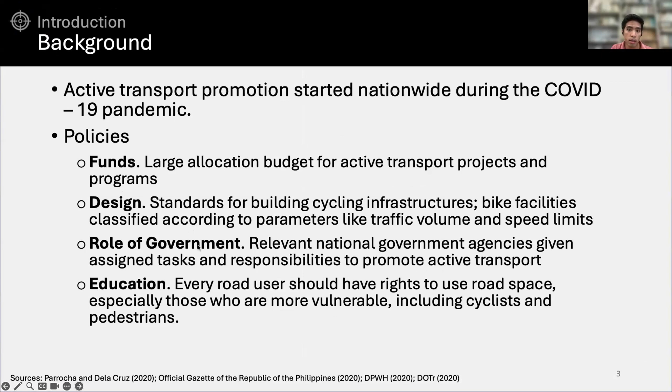As a background, during the COVID-19 pandemic, the Philippine government promoted active transport by funding projects and programs, standardizing designs for bike facilities and infrastructures, defining agency roles among other government agencies in the Philippines, and educating for safer interactions on the road, especially for pedestrians and cyclists, who we see are the most vulnerable among the others. So the establishment of bike lanes led to a rise in cyclists, as well as cycling accidents, with a 48% increase in Metro Manila from 2019 to 2020.

Moreover, some bike lanes are disconnected, and as normalcy returns after COVID, the need for bike lanes is being questioned in some areas in Metro Manila, which became the most congested metropolitan area in 2023. So this leads to the formulation of the research problem, which focuses on designing a bike network that considers the existing traffic, the road space, and budget constraints, with the goal of enhancing cyclist comfort and ensuring connectivity of links that have bike lanes.

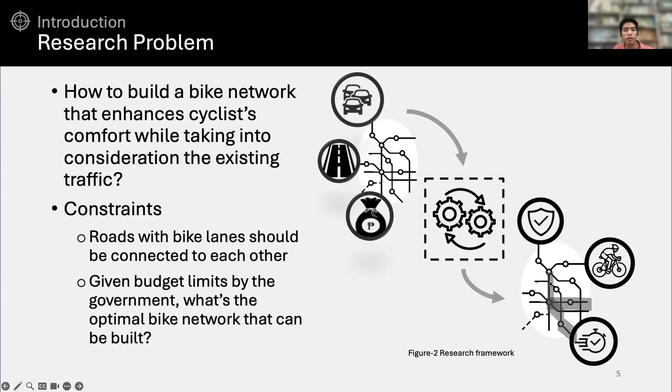So for the scope of my research, I selected Pasig City in Metro Manila as my study area due to its dedication in promoting cycling, its institutional capacity, and the city having an existing bike network, which has been established even before the pandemic.

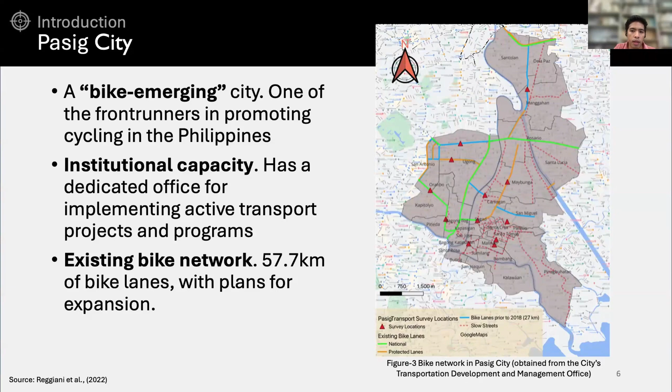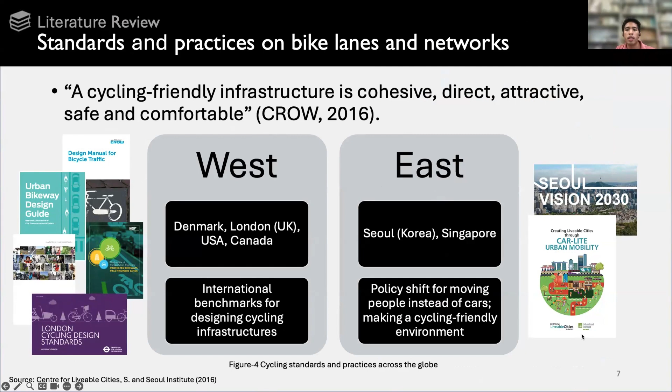In my literature review, international benchmarks for cycling infrastructure are primarily from Western countries. CROW from Netherlands identifies five key elements of cycling-friendly infrastructure, which are found to be consistent across various guidelines. On the other hand, recent policy shifts in Eastern countries like Korea and Singapore now emphasize moving people instead of cars and creating cycling-friendly environments.

Creating a cycling-friendly environment has been explored in previous studies, especially with bike network design. These studies used optimization problems in building bike networks according to selected goals, such as maximizing accessibility, comfort, or bike travel, or even minimizing cycling risks to prevent further accidents for cyclists, as well as others that interact with them.

On the other hand, a road that allows faster speeds, has higher traffic volume, and higher parking turnover rate decreases cycling comfort levels. Originally developed in the US, BCI is now widely used and accepted and has been used in other studies as well. In this study, I also adopted the BCI for bi-level optimization.

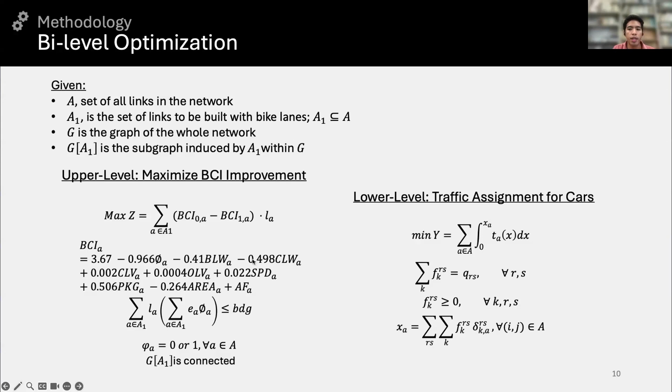Then each set of links forms a subgraph to ensure connectivity of links, and this must stay within the budget imposed on the model. So solving for the optimization problem, I used a genetic algorithm which has been used in previous studies in optimizing bike networks.

This generates an initial set of solutions used to obtain values of the objective functions in the lower and upper levels. Solutions with the optimal value will undergo crossover and mutation techniques that generate offspring solutions more likely to improve the values of the objective function. This cycle continues until the maximum number of iterations is satisfied, which will then further identify the most optimal solution in this framework.

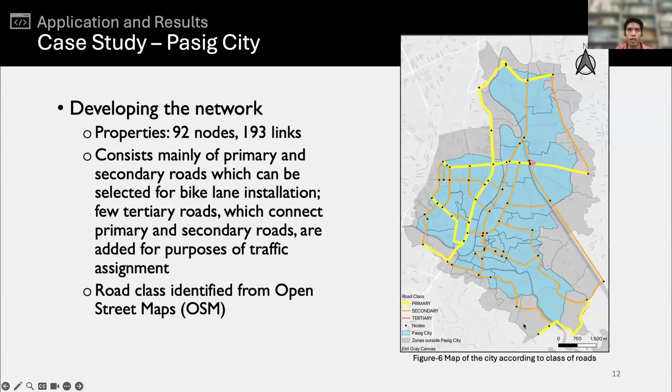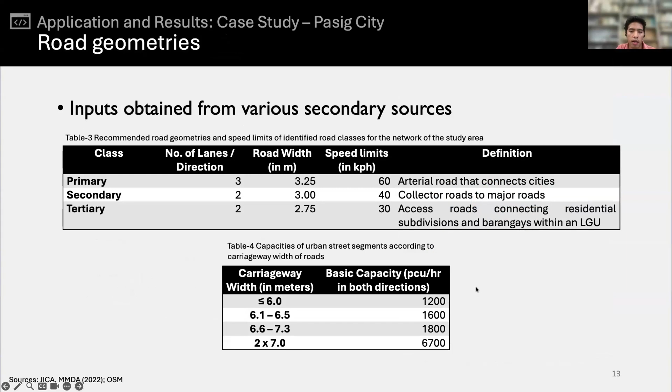So these network roads feature classifications such as the road class, number of lanes, road widths, road speeds, and capacities, whose minimum and recommended requirements were derived from existing reports for Metro Manila, Google Maps, and OpenStreetMap, among others.

So in that particular trip demand, I used the morning peak hour of the area, that is around 7 to 8 o'clock in the morning.

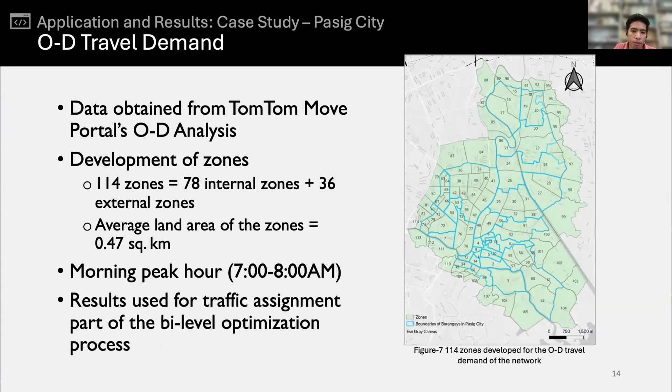So assuming lane widths in all roads measure 3.35 meters, lane width reduction applies only to roads with 2 or more lanes. So for 2-lane roads, a temporary road diet is proposed since the bike lane width doesn't meet NACTO's minimum requirements of 1.5 meter for conventional bike lanes.

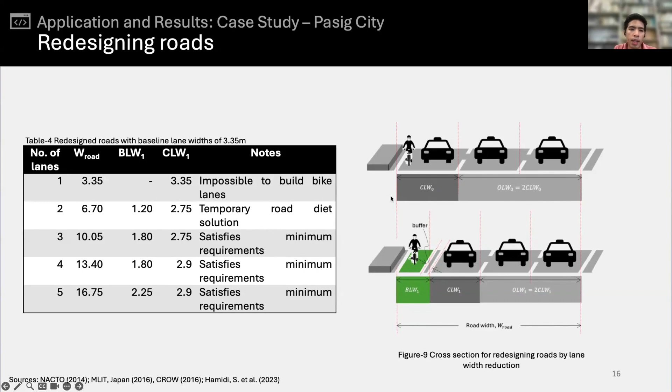So this proposal follows Japan's Ministry of Land, Infrastructure, Transport, and Tourism's guidelines, which recommended bike lanes of at least 1 meter wide where space is limited. So for other lanes, both the bike lane width and curb lane width meet the minimum requirements.

Moreover, the presence of a critical link in the solution shows a link that weakens the network connectivity, as the removal of this particular link will violate the connectivity constraint that is imposed in the model.

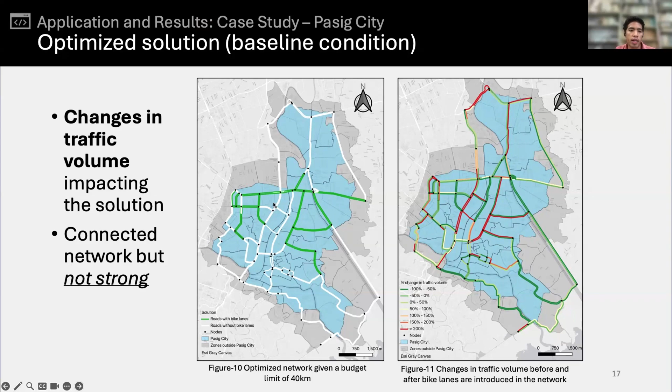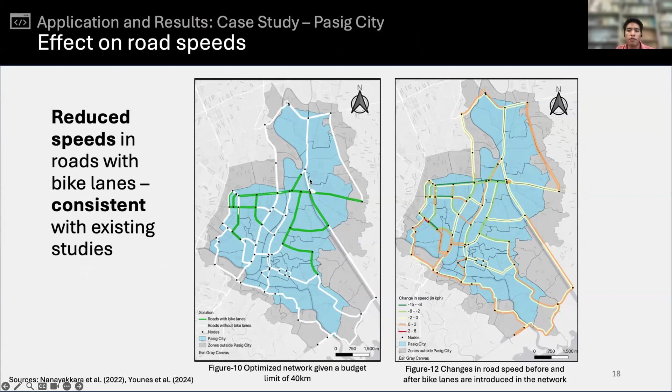On the other hand, observations on roads with bike lanes have reduced speeds. As we can see here, the roads that have greener links have reduced speeds, and those are the ones that are built with the bike lanes. So this is consistent with existing studies showing the impacts of building bike lanes on motor vehicle traffic.

Moreover, from the perspective of transport planners and authorities, this budget constraint feature of the model can be taken advantage of to determine which links should be prioritized to immediately improve cycling comfort in the network. In this case, this area is the first one that will be built with bike lanes, since this area provides more comfort. And once you increase the budget limit in the model, the network continues to grow until it reaches the other side of the network in this case.

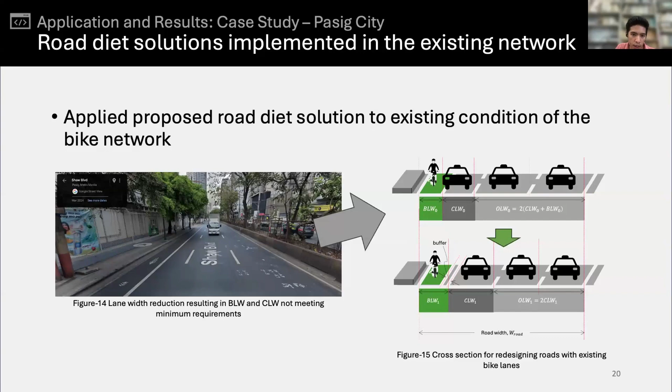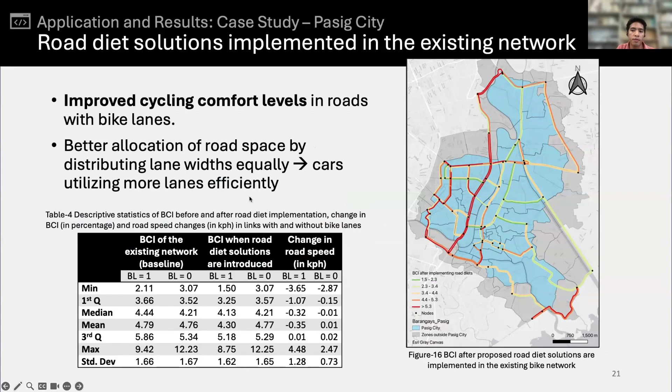The proposed road diet solutions address this issue, adjusting the lane widths to evaluate their impact on the existing network. When these proposed solutions were applied, we saw slightly improved cycling comfort levels in roads with bike lanes, as shown in this table. This is apart from motor vehicle traffic being able to use the curb lane width more efficiently after the curb lane widths were adjusted.

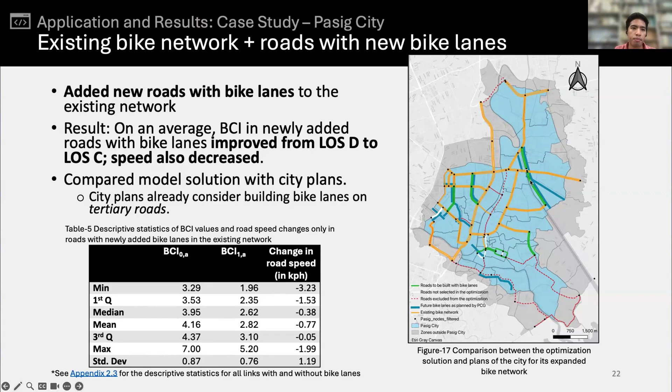For the conclusion, this research applied the model to Pasig City, which enhanced cycling comfort levels. Traffic volume parameters between the lower and upper levels of optimization significantly impact the selection of roads for bike lanes. Roads with bike lanes show reduced speeds compared to when they had no bike lanes. Additionally, budget constraints can help transport planners and authorities plan their network according to their timelines.

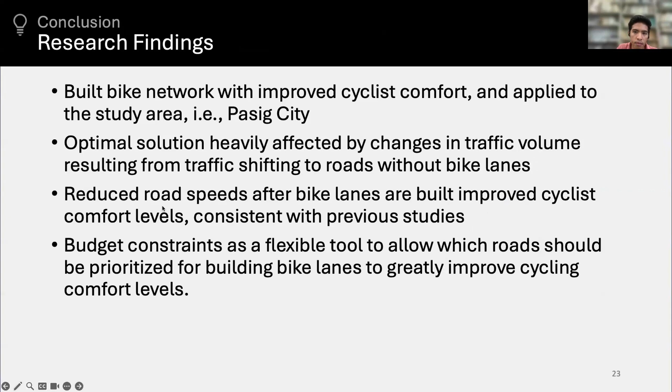While conducting this study, a number of limitations were encountered. First, the BCI tool, even though widely accepted, was not locally calibrated due to time constraints. Then, secondary sources underestimated OD travel demand on congested roads, which really affected the solution, considering that a particular road in the network was initially not congested, but its existing condition is really congested. This really affected the solution for this particular study area.

Furthermore, while there is a connectivity constraint, it only checked the link connections and not the quality of the network's connectedness. Hence the solution has weak connectivity, particularly a critical link in a major road in the network. Tertiary roads were also excluded from bike lane construction, based on input from an officer I interviewed in the transportation department of the Philippines. Finally, cyclist demand, which was attempted to be incorporated in the model, was not considered due to a lack of available OD data, especially for cyclists.

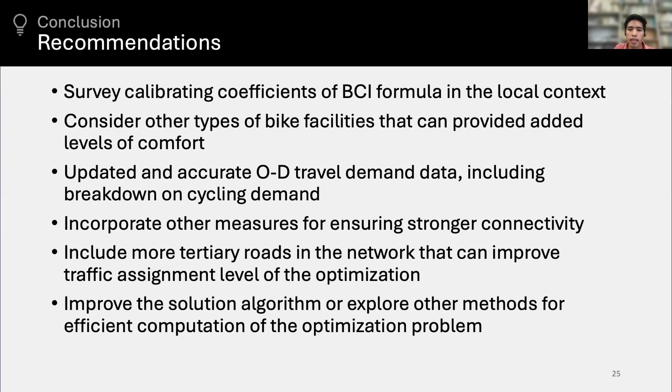Thank you very much. Thank you very much, Justin.

So we have two questions in the chat, I will read them out loud. Thank you for your interesting talk. It seems the bi-level model presented on page 10 includes at least two modes, cycling and vehicles. Is mode choice, how passengers select between cycling and vehicles, involved in the study? Are you using mode choice to model the mode that actually users use?

For this study, I haven't included mode choice, considering the lack of data for doing so and conducting the study on determining the mode choice in that particular study area. But I think it's also important to consider mode choice to determine which routes the cyclist will go to when they use a bicycle around the network to travel, as well as whether they will even use bicycles, considering that right now in the Philippine setting, cycling trips are relatively low compared to other global cities that are really bike friendly.

But I think in future studies, conducting mode choice is a good idea to determine further how many trips can come from cycling in this particular network.

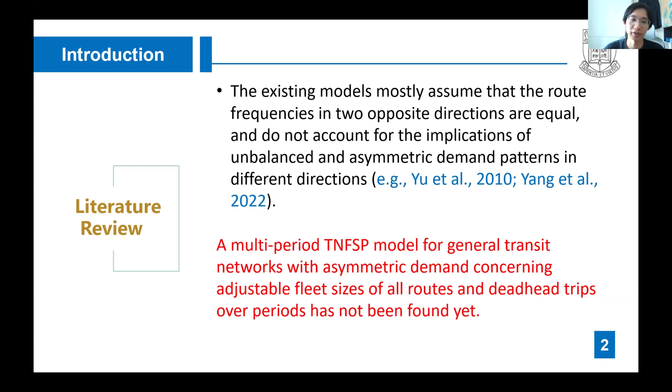We also noticed that the bus operator serving Tin Shui Wai, a suburban residential area in Hong Kong, is facing the same issue. Most residents of Tin Shui Wai work in the urban area of Hong Kong, and bus service is the main commuting mode for Tin Shui Wai residents. However, compared with the stable and relatively balanced ridership to and from Tin Shui Wai in off-peak hours, passenger travel demand has significant directional characteristics during peak hours.

However, the traditional symmetric design still cannot fully meet the asymmetric demand pattern. So the operator hopes to adjust the current design for the developed network to adapt to passenger demand variation and improve their operating profit. Especially during peak hours, the route frequency should increase in the direction with high demand, while that in the low-demand direction should decrease, to allocate more buses to the high-demand directions.

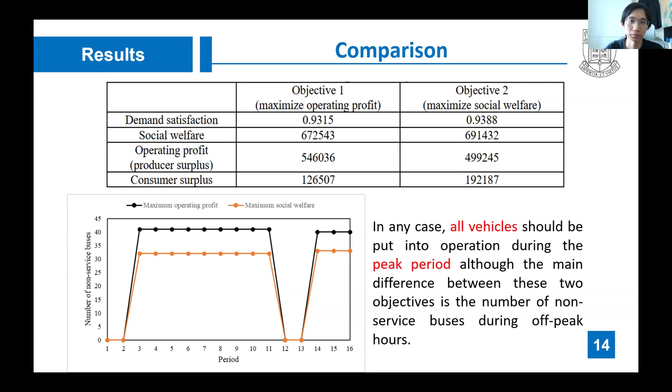Also, we compare the traditional symmetric design throughout the day, and we find that the proposed design performs better than the traditional design in all-day operation, with different degrees of improvement in both peak and off-peak hours. We also found that as the minimum frequency decreases or the demand level increases, the proposed design provides more significant benefit to passengers and the operator.

So that's the end of my page. Thank you very much.

This is a little bit out of my expertise, so it's going to be a very basic question. But I want to ask, how do bus operators in Hong Kong actually do the assignment at the moment? Because I would assume that maybe they base it on their experience, since they have been doing this for a long time. And do you think this kind of heuristic based on experience is working for them? Because I would assume they would not like to lose some profits, right?

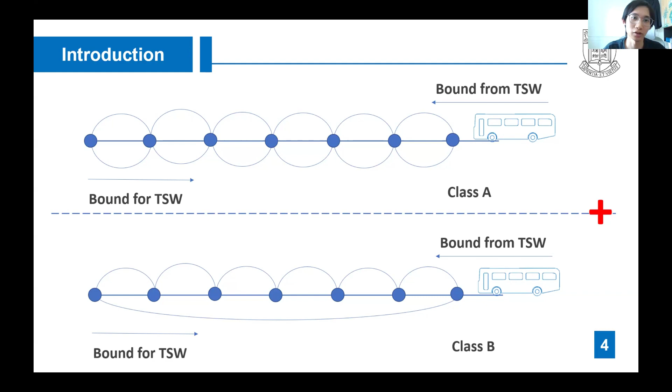Yes, they will also talk with us, and we found that passengers can read the frequency setting easily, not with frequent changes, so they think this is okay.

Testing, can you hear me? The volume is a bit low. Can you hear me now? It's a little bit low. Can you talk? Testing, good, okay, thank you.

Thank you, Professor Parati. Good morning, afternoon, and evening. This is Mingxuan from the University of Hong Kong, and I'm also from the research group of Professor Jintao. Today, I'm going to talk about a loading strategy for the bike repositioning problem with e-bikes and conventional bikes.

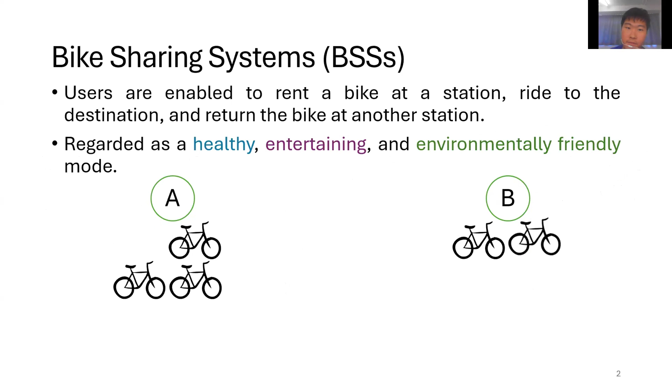Bike sharing systems have been implemented worldwide. In such systems, users are enabled to rent a bike at a station, ride it all the way to the destination, and return the bike at another station. Bike sharing has been regarded as a healthy, entertaining, and environmentally friendly mode of transport.

At the end of the day, due to user activities, some stations may become in surplus or deficit in terms of bikes. This will result in failed user requests. For example, a user cannot rent a bike at an empty station. So that's where bike repositioning comes in.

The purpose of bike repositioning is to rebalance the number of bikes at each station. A typical way is to hire a truck and transport bikes, for example, from station B all the way to station A. The bike repositioning problem includes a routing problem, which stations to visit and the order of visits, and also a loading and unloading subproblem, how many bikes should be loaded and unloaded at each station.

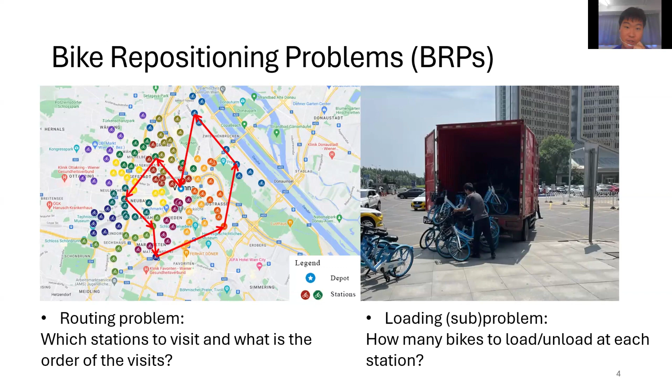The challenge in the loading strategy is that the vehicle capacity is limited. So how do we allocate the limited vehicle capacity between the two types of bikes?

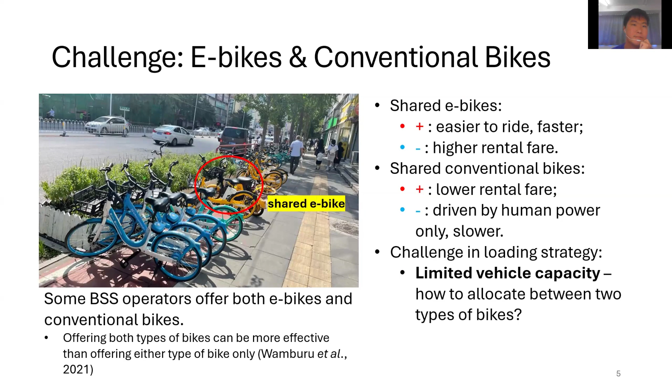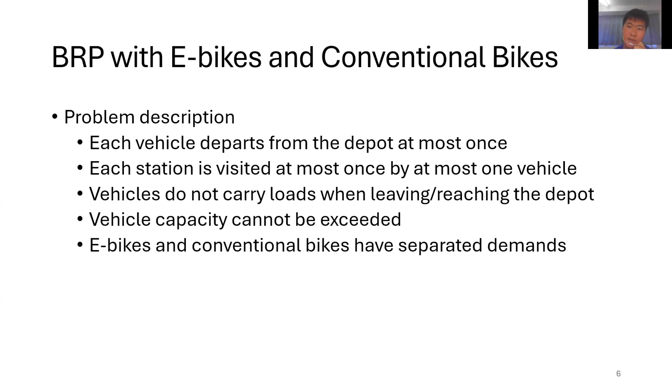Here's the problem description for this bike repositioning problem. Each vehicle departs from the depot at most once. Each station is visited by at most one vehicle, and the vehicle does not carry any load when it leaves or reaches the depot, and the vehicle capacity cannot be exceeded. E-bikes and conventional bikes are considered to have separate demands, and the objective is to minimize the weighted sum of the total deficiencies of e-bikes and conventional bikes and the total travel, loading and unloading time. Here's the model for the bike repositioning problem.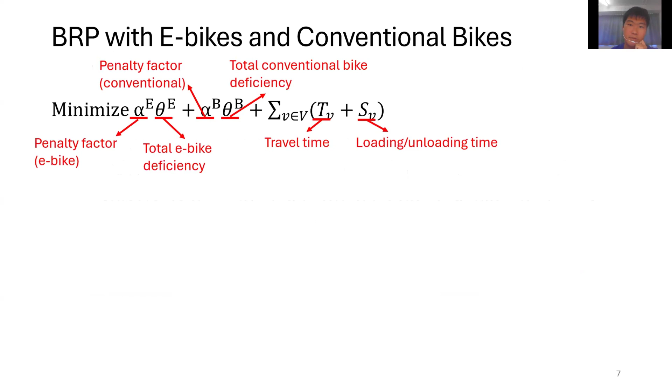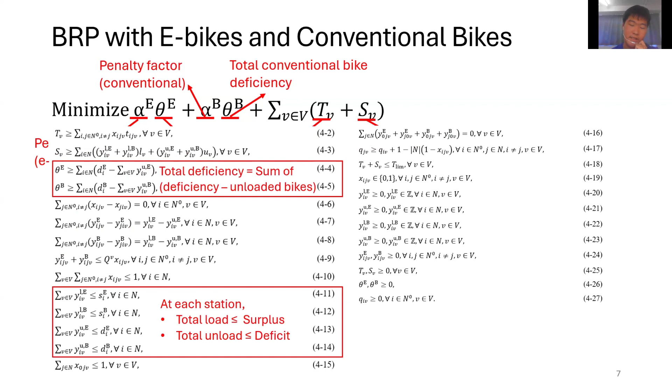The first two terms are the weighted total deficiencies in e-bikes and conventional bikes, and the third term is the sum of the travel time and loading and unloading time. In terms of constraints, the total deficiency is defined by the sum of the deficiency minus the bikes unloaded at a station, and also at each station, the total number of loading or unloading are bounded by the surplus or deficit at a station.

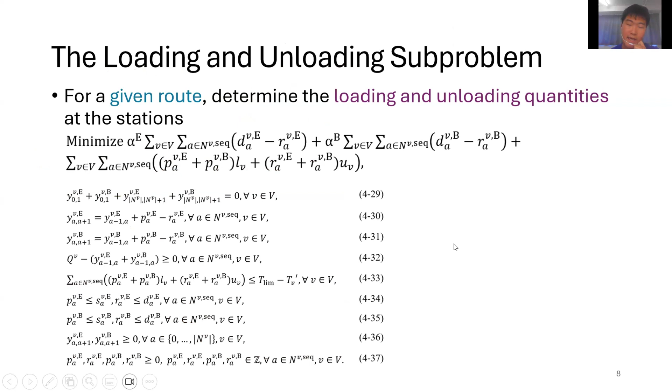So with the model given in the previous slide, the loading and unloading subproblem can be extracted from it by assuming that the route is already given. Once the route is fixed, the remaining task is to find out the loading and unloading quantities at each station. Again, the first two terms are the weighted deficiencies for e-bikes and conventional bikes, and the third term now only contains the loading and unloading time. This is a set for all the stations on the route, and again, the loading and unloading quantities are bounded by the surplus and the deficit at a station.

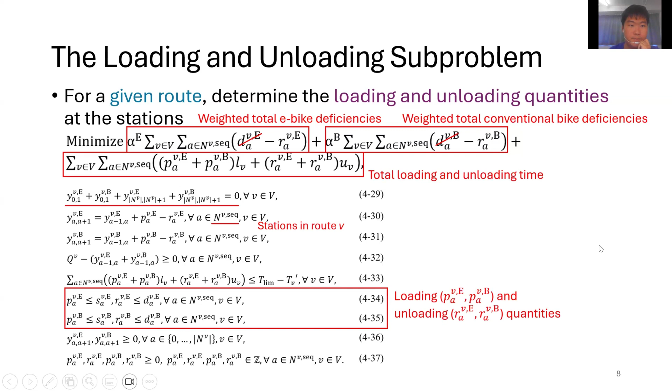Because the D terms refer to deficit at a station, they are parameters, so they can be removed from the objective. By rearranging the objective, we get this. Because the decision variable R, which refers to the unloading quantities of e-bikes and conventional bikes, is non-negative, if the parameter in the brackets is also non-negative, then there is no benefit to do any relocation. By assuming that the parameters in the brackets are smaller than 0, two specific cases are considered.

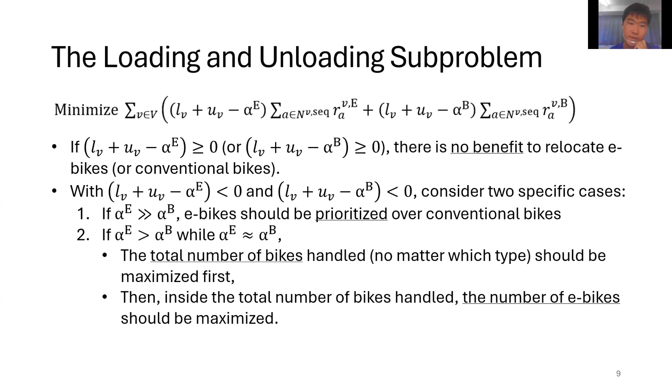Firstly, the unit penalty for e-bike is far larger than that of a conventional bike. The second case is that the unit penalty for e-bike is just slightly larger than the conventional bike. For each case, there is a tailor-made algorithm, but due to time constraints today, algorithm 1 will be the focus. Let's consider this example.

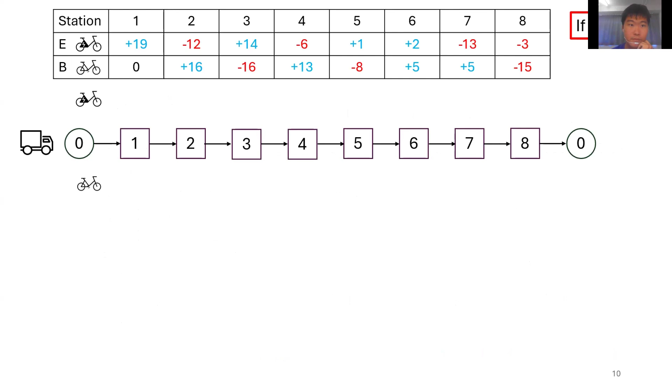Supposing we have a route with 8 stations, and the surplus and deficit of e-bikes and conventional bikes are shown in the table above. The blue values are the surplus and the red values are the deficit. A simple way is just to consider the loading and unloading in a forward greedy method. Forward means that the loading and unloading quantities are confirmed from the beginning of the route, and greedy means that we just basically load or unload as many as possible.

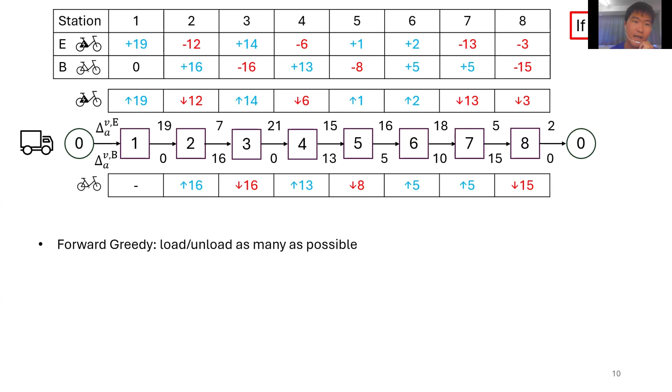This will result in loading and unloading quantities like this. After having this, we can also calculate how many e-bikes and conventional bikes are loaded on the vehicle when it travels from a station to another. For example, after loading 19 e-bikes at station 1, there will be 19 e-bikes on the vehicle when it travels from station 1 to station 2.

However, there are two problems observed here. Firstly, there are some e-bikes loaded, but they are not unloaded at any other stations. This violates one of the problem descriptions. Also, previously we just assumed that the vehicle has infinite capacity, but suppose we have a capacitated vehicle with a maximum capacity. Then at these locations, the vehicle capacity is exceeded. This reminds us that one of the challenges is how to allocate the limited space between two types of different bikes.

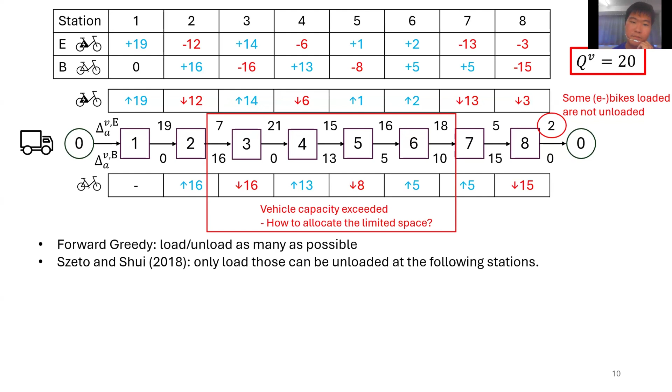So in this paper published in 2018, they considered the loading and unloading strategy for a single type of bike. The idea is that the bike should only be loaded if it can be unloaded at the following stations. Following their idea, if we consider the loading quantities for e-bikes, for example at station 3, the outstanding deficit at the following stations from 5 to 8 is 13, and the deficit at station 4 is 6. At the same time, the current load of e-bikes on the vehicle is 7.

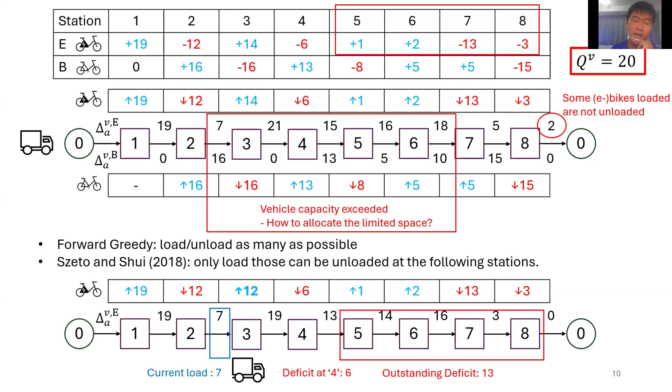So instead of loading all 14 surplus e-bikes at station 3, loading just 12 will be enough to fill the deficit at the following stations. By doing this, there will be no e-bikes loaded but not unloaded at another station, and if we just consider e-bikes, the vehicle capacity is not exceeded as well.

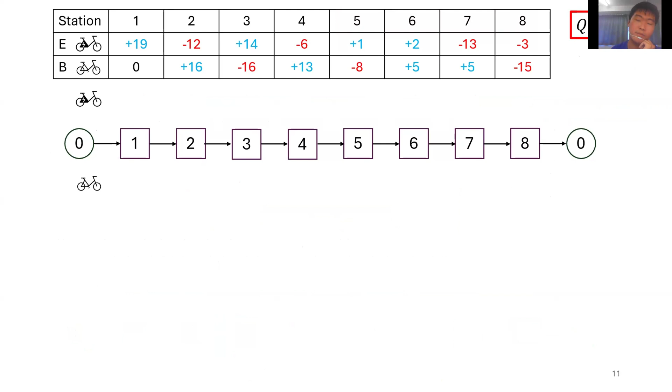So using the similar idea, let's consider the loading and unloading strategy for both e-bikes and conventional bikes. In algorithm 1, e-bikes are prioritized because they have a far larger unit penalty. So here we consider the loading quantity of e-bikes first from backward, and at the same time for the unloading quantity, we just assume that all the deficit can be filled. The unloading quantity will only be figured out after the loading quantities are calculated.

The gray value means that we just assume the deficit can be filled by loading e-bikes there. So when we consider the loading quantity at station 3, the current outstanding deficit at station 3 is 19. The calculation process is here, and the station surplus here for e-bike is 14. Taking the minimum value of these two, 14 e-bikes are loaded at station 3.

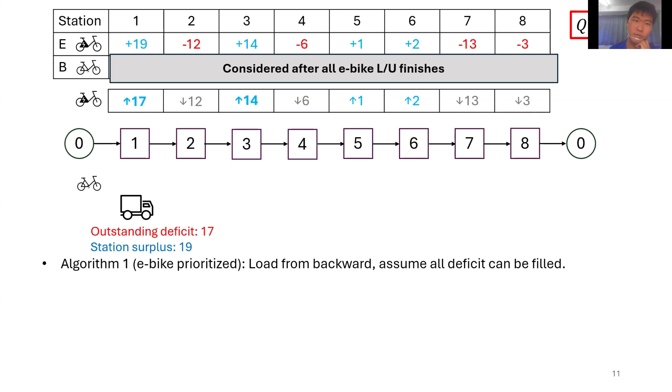For station 2, we just assume 12 can be unloaded. For station 1, the outstanding deficit here is 17, while the station surplus is 19. By taking the minimum of these two, loading only 17 e-bikes will be enough to fill the deficit at the following stations. So after having the loading quantities, the unloading quantities, together with the loading of e-bikes on the vehicle along the route, can be calculated.

Then we proceed to consider the conventional bikes. For example, at station 7, the surplus of conventional bike is 5, and the deficit at station 8 is 15. So we can just load 5 conventional bikes at station 7.

However, when it comes to station 6, the outstanding deficit is 10, and the station surplus is 5. But because we already know that there will be 16 e-bikes on the vehicle when it travels from station 6 to station 7, at most 4 conventional bikes can be loaded at this station.

Similarly for station 4, the outstanding deficit here is 14, the station surplus is 13. But because there will be 13 e-bikes on the vehicle when it travels from station 4 to station 5, at most 7 can be loaded at this station. Also similarly at station 2, although there are like 16 surplus conventional bikes at the station, at most 15 can be loaded.

So after having the loading quantities, the unloading quantities, the red numbers, and the loading of conventional bikes on the vehicle along the route can be calculated.

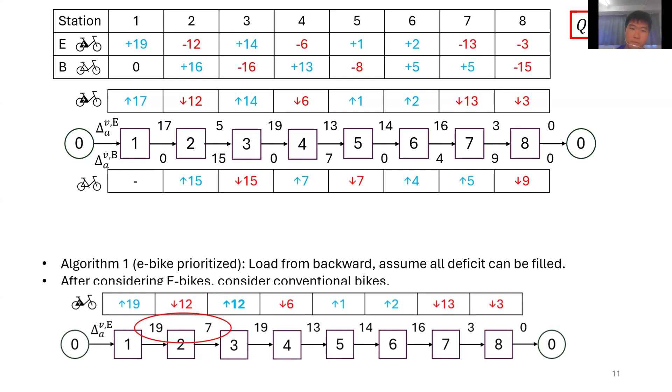For example, in the circled area, if we follow the loading quantity of e-bikes on the previous slide, there will be 7 e-bikes on the vehicle when it travels from 2 to 3, which means it will be impossible for us to load 15 conventional bikes at station 2 because of the vehicle capacity.

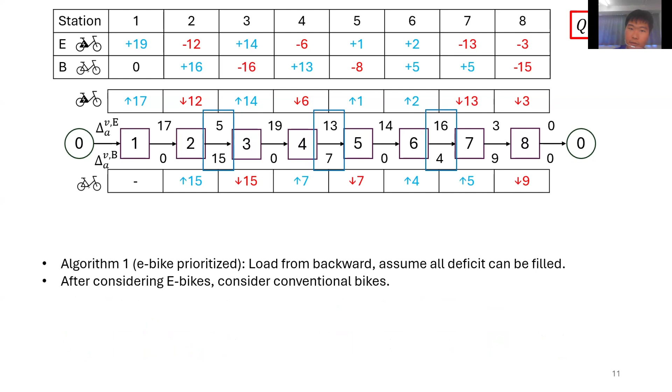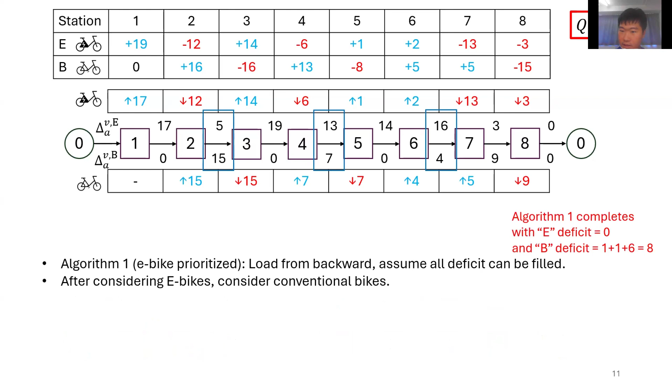So here, if we check the vehicle loading at the critical points, we can find that the vehicle capacity is not violated. And here, algorithm 1 completes with no e-bike deficit, and the conventional bike deficit is equal to 8.

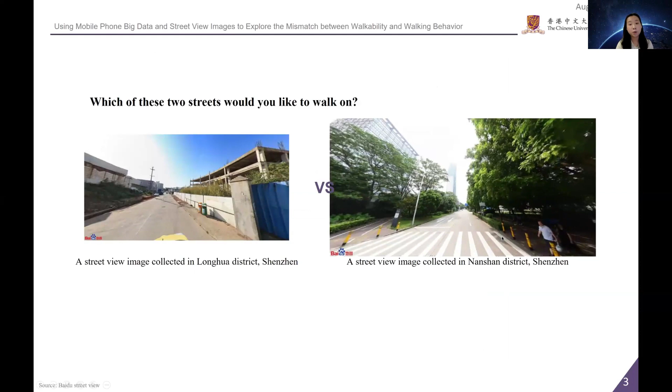These two pictures show different streets, and I would like to ask a question: which street would you prefer to walk along? I believe most of us would prefer the right street with greenery, street lights, and sidewalks. The left street has no sidewalks and no street lights. Obviously, the built environment on the right is more friendly for pedestrians. Walkability is defined as a measure of how the built environment is pedestrian friendly.

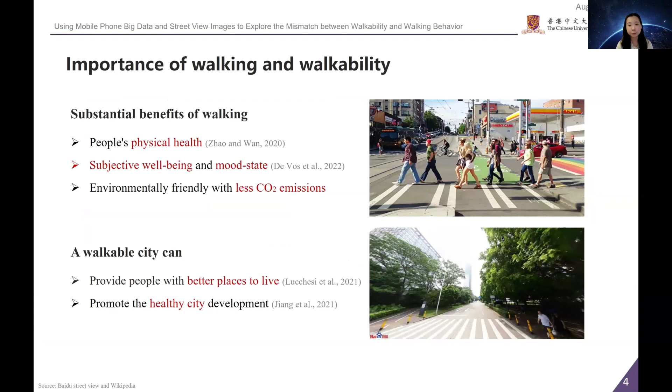Walking has substantial benefits to people's health and can reduce carbon emissions. A walkable city can promote healthy city development. So in order to promote more citizens to walk, it's important for us to understand the relationship between walkability and walking behavior.

After reviewing the literature, I identified several research gaps. First, typical walkability frameworks, such as the 3D and 5D frameworks, are developed from the perspective of urban form and based on random utility theories. They assume pedestrians make decisions based on maximum utility, shorter time or shorter distance. But in reality, pedestrians may prefer walking on safer or more attractive areas or routes rather than shorter times or distance. Obviously, these typical frameworks overlook some important pedestrian needs.

Most of them consist of meso-scale built environment features at the neighborhood level, like land use mix and street connectivity, and they overlook micro-scale features at the street level, such as trees, street lights, and sidewalks, even though these have a greater association with walking activity.

Regarding walking behavior, most studies collect it through conventional approaches such as surveys and portable devices, but these methods are costly and limited to small spatial-temporal coverage. Big data approaches, such as mobile phone big data, receive little attention in walking behavior literature. More importantly, in existing big data and mobile phone big data studies, the validation part is commonly unclear, and that is a problem because further discussion on big data studies without verification is probably meaningless.

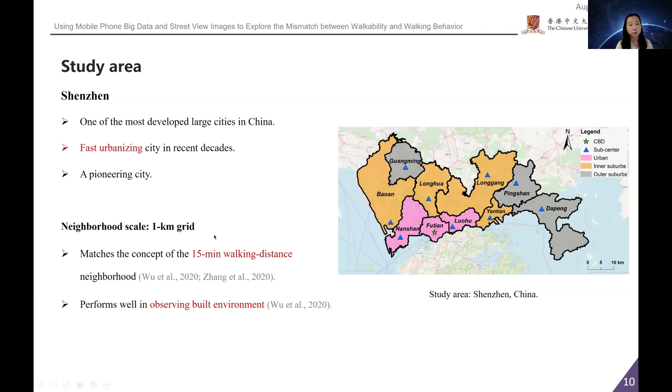Walking behavior is extracted from mobile phone data, and I focus on collective walking behavior. The variable is the number of walking trips in the neighborhood. Walking trips are extracted from 6 months of mobile phone data. The data is cellular tower-based data collected from CMCC, the largest telecommunication company in mainland China. Walking trips are extracted through a rule-based heuristic method. I collected over 174 million walking trips in Shenzhen.

I collected some ground truth GPS data to validate the walking trip extraction method. I recruited volunteers to collect their GPS data for 2 weeks through a mobile app, and at the same time they reported their trips and transport mode. I then converted the GPS data to cellular tower-based data and used the DCM method to extract walking trips from the data. Based on the confusion matrix, I calculated the accuracy rate of the walking trip extraction method, and it's more reliable than previous studies that validate their methods with official modal share or aggregate data.

Based on social psychological theories, I built a walkability framework from 4 pedestrian needs: safety, convenience, continuity, and attractiveness. All the variables are extracted from open data, such as street view images, social media data, POI data, government open data, and GIS data. The framework also integrates meso-scale and micro-scale environment features.

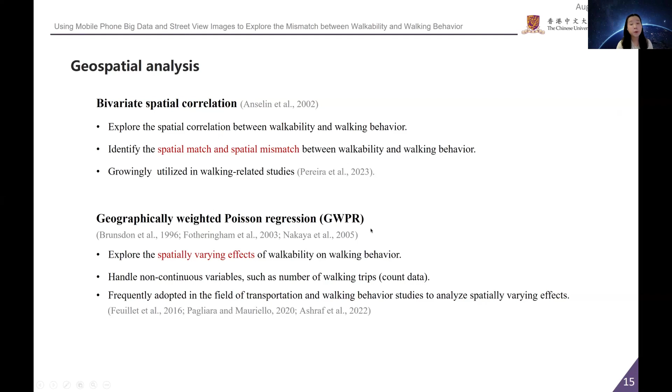I'm not sure if everyone is familiar with the urban village in China. It's an informal housing type that provides cheap, high density housing for low income people. It's quite popular in large cities in China. Even though urban villages have high density walking demand, they are served by a pretty poor walking environment in the city.

The result of GWPR reveals the spatial varying effect of walkability on walking behavior. First, the positive effect of walkability is strong in the fringe part of urban areas and in the inner suburbs.

In terms of the 4 subdimensions: the positive effect of safety is strong in the suburban areas, and the positive effect of convenience is stronger in the outer suburb. The positive effect of continuity is greater in the western part of the city, and the positive effect of attractiveness is clustered in the central and western part of the city.

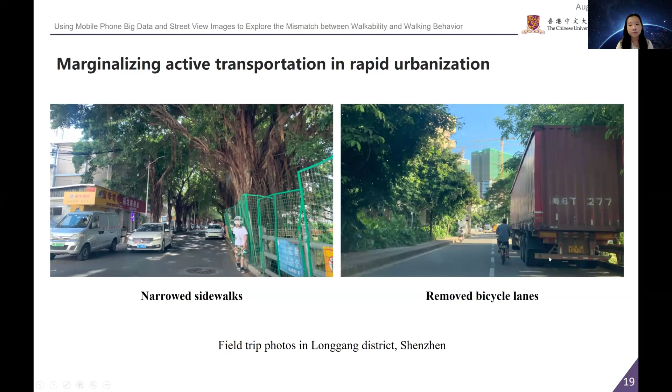In conclusion, our study explored the mismatch between walkability and walking behavior in Shenzhen using mobile phone big data and street view images. We identified the mismatch areas and explored the spatial varying effects of walkability on walking behavior. Based on the findings, we proposed some prioritized and contextualized built environment intervention strategies and policy implications.

We also shed light on the fact that a city-wide uniform strategy may not fit all regions in the city, and urban planners should perform strategic intervention based on spatial patterns to foster walkable and healthy cities. Thank you.

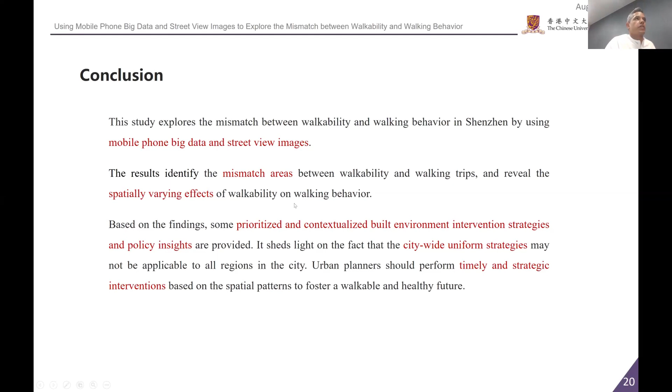Thank you very much. Can you show them the mismatch map? Where you have the high, high, high, low, low, high. Yes, here. So there are 2 things that I'm curious about.

First of all, what is the population? How much of the population lives in the high-high area, in the high-low area, in the low-high area, and in the low-low area? Because I think when you're thinking about a policy intervention, you also need to know how many people you are actually addressing.

The high-low and low-high areas are related to walkability and walking trips, and the number of walking trips may be related to the population, but here we just focus on these 2 variables, and maybe the area with more walking trips being a high density area is also quite common, but not necessarily related to density. In general, if I ask you what percentage of this city, Shenzhen, sorry, what percent of this city lives in the high area, for example?

20%, 30%? I didn't count the exact population numbers in the high areas, but it's quite common for cities in China that more people live in the subcenter or CBD areas, or more people living in urban areas and suburban subcenters in the city.

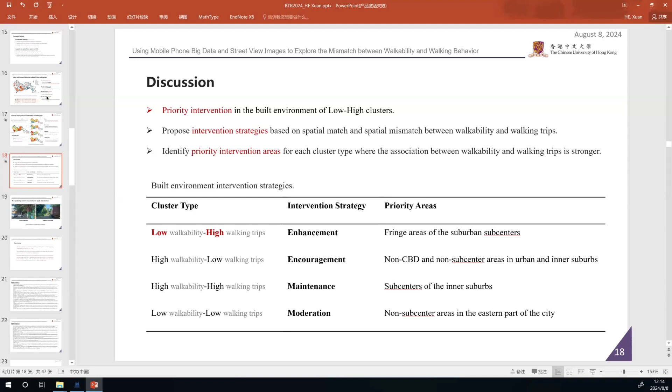Yikan, maybe you can unmute yourself and explain. Let's go back to the maps. We have different four clusters, right? The boundary areas between different clusters may not be that arbitrary, so it may involve the area could be a low-high area after a while. So would we change the corresponding strategies because of this dynamic change?

Sorry, I didn't catch you. So have you considered the evolvement of the different clusters? Yes.

That point I also highlight in the paper, because the low-high cluster, low walkability but high walking cluster, they're located in the fringe part of the subcenter. This may be related to the evolvement: at the very beginning, the subcenter is walkable and a very friendly environment for pedestrians, but the boundary of the subcenter becomes larger and larger. There are more population in the subcenter, and then the high walking trip areas become larger than the walkable areas, creating the low-high cluster in the fringe part of the subcenter. Am I clear? Yeah, that makes sense to me. Thank you, very good.

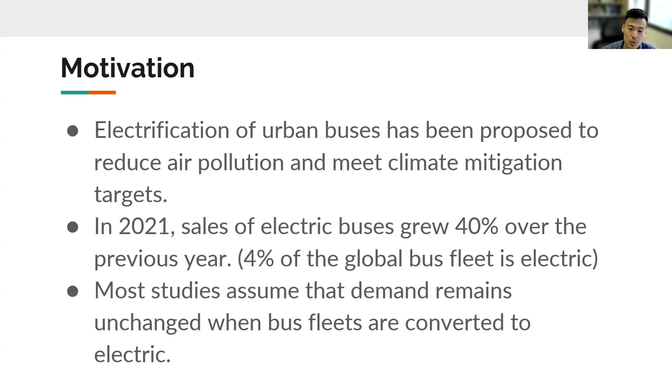Most studies that look at the effects of bus electrification assume that demand remains unchanged. They look a lot at the supply side and how things change because of the change in energy source, but assume riders behave the same way as they've always done. In this paper, we test the assumption that commuters are indifferent between electric and diesel buses, because there are amenities worth capturing from electric buses.

There are lower noise levels and also less local particulate matter from the exhaust pipes. We believe this could be quite important because if you are a public transport user, waiting at your bus stop or bus bay can be the moment of peak exposure to air toxins when a bus stops and then leaves, and you get all of the fumes from the tailpipe.

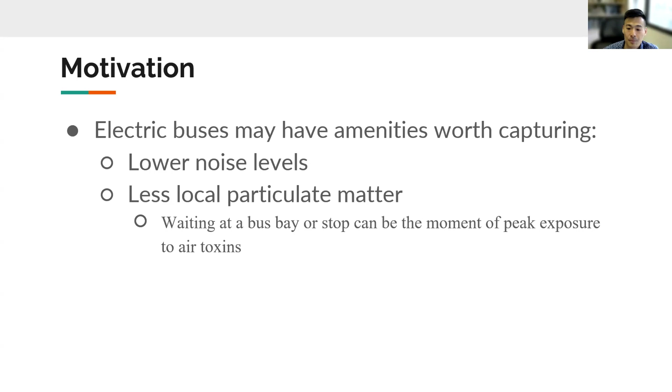The context we are looking at here is Singapore, because that's the city we are in, and because Singapore's Transit Authority, the Land Transport Authority, began electrifying buses in April 2020. Here we have a photo of the electric buses introduced. They are very similar to the diesel buses within the system - same color, look more or less the same, but with a few distinctions.

When you board the bus, there's a very small sticker that says the bus is an eco bus. If you board a double-decker bus, at the back, because there is space, they put a big sticker that says 'eco-friendly electric bus, 100% cleaner energy.' So there is some distinction from a diesel bus, but for the most part the colors and look are the same.

During the period of our study, April 2020 for about a year, only 60 electric buses were deployed. This is the beginning of the conversion of the fleet for Singapore, relative to a fleet of 4,000 buses - a drop in the ocean. There are also a small handful, maybe fewer than 50, hybrid buses within the fleet.

I'll start by giving a quick summary of our findings. We look at 3 data sources. The first is ridership data from LTA, the Transit Authority, on how people tap in and out of buses, riding the actual buses. Then we conduct 2 surveys: the first is an intercept survey, where we go to bus stops and interview or survey commuters when they are getting off the bus. The third is we run stated choice experiments with households, which I call a household survey - I'll give more details on that in just 2 slides.

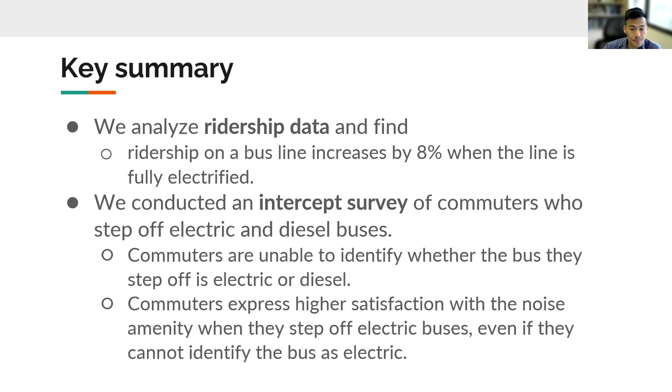And then finally, in our household survey, we gave our participants 2 choice experiments. In the first choice experiment, they have to choose between the powertrain of a bus, either electric or diesel, and at the same time there are different travel times associated with these buses, so they make that trade-off.

And then in the second choice experiment, they have to choose between an express bus and a regular bus, so that's a time trade-off, but of course the express bus is going to be more expensive. When we put these 2 choice experiments together, we can estimate a willingness to pay for an electric bus ride, and from that we get a number of 8.5 US cents per ride. That's how much more people are willing to pay to sit on an electric bus instead of a diesel bus. That aggregates up to $122 million more per year, or $20 more per resident per year.

Okay, so I'll start here by giving you more details on this ridership data we have, how we come up with this 8% increase in ridership. What we did is we asked the LTA for data on 15 of their busiest bus lines that were in our intercept survey, where we were surveying people at the bus stops. So from the intercept survey locations, we pulled the 15 busiest lines. 7 of those lines were partially electrified, and the remaining 8 were fully diesel across the entire sample period.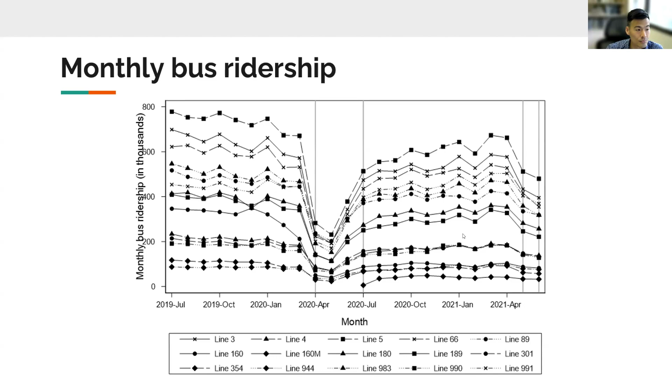Right, okay, so then getting to the results. First thing we do is aggregate up all of these rides to the level of our bus lines and week. So the observation here is the number of rides on a particular bus line in one week. And this is a standard fixed effects, or difference-in-difference, regression where we control for the bus line and for time, for the week.

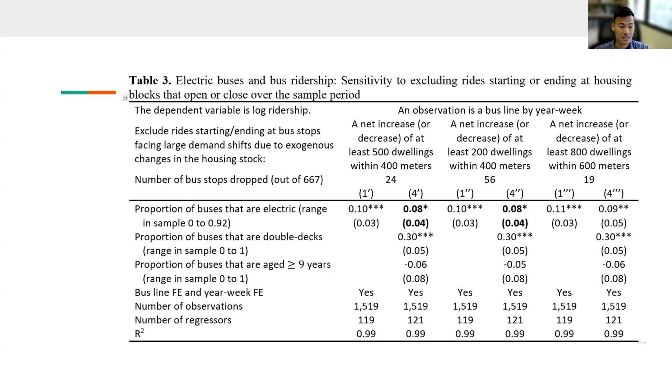A few other things we find, which I won't show tables for: ridership increases with both electrification intensity — the more electrified the line, the more ridership there is — and also the longer a line is electrified, the more ridership increases. That suggests commuters are learning and responding as they become more aware of these changes happening on their lines. There's also a list of other confounding factors we were concerned about, so we ran robustness checks and our results hold.

Okay, the next thing I want to talk about is this intercept survey. So the other thing we did is go to bus stops and talk to people, asking a very quick question about the bus they rode when they get off. We covered 4 neighborhoods within Singapore, all very quiet.

On average, the median number of buses serving each of these bus stops is just 2. There are 22 bus stops, 31 lines covered, and we interviewed almost 1,300 people getting off both diesel and electric buses between December 2020 and April 2021. This is the survey — we asked them two questions, or two categories of questions.

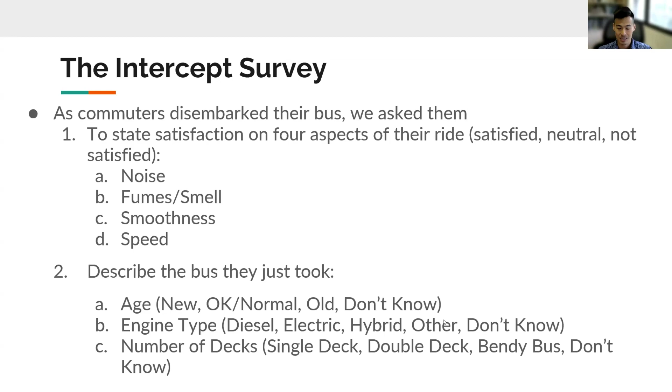Based on that, we have some results too. We then went and got the actual descriptions of the buses that these commuters rode from LTA. So we know, regardless of what they said, whether the bus is diesel or electric. We know how old the bus is, all of those things.

We could then verify whether these commuters were aware of whether the bus they're getting off is electric or diesel. Maybe not too much of a surprise, only 34% of people who step off a diesel bus can correctly identify their bus as diesel. And only 24% of people who step off an electric bus can identify their bus as electric. The proportion choosing don't know is high, 54% and 55% respectively. But that also suggests that the electric bus people are more often getting it wrong by saying it's diesel or hybrid, relative to the diesel people, where 34% of them are getting it right.

One thing we thought was that maybe it's difficult for commuters who get off partially electrified lines to tell you whether the bus is electric or diesel, because sometimes it's electric, sometimes it's diesel, and they're not always paying attention. So we limited ourselves to the sample of commuters who are only on bus lines that are fully diesel, so there's no changes going on, every bus they get off is a diesel bus. Can they then tell us that the bus is diesel? The answer is no. Still about 36% of them correctly identify their bus as being diesel, and 54% say that they don't know. So you don't do any better on fully diesel lines.

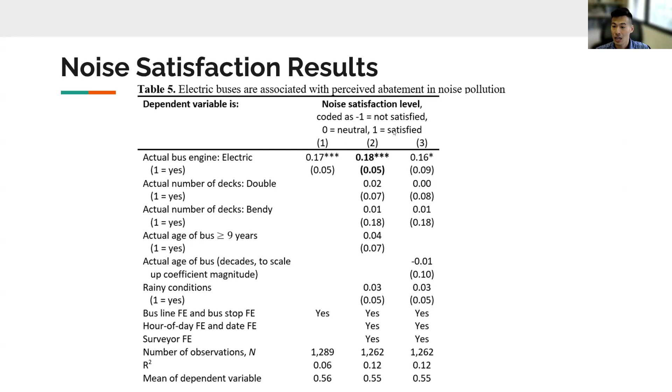Then we look at the satisfaction questions: are they satisfied or not satisfied with their rides in terms of the different qualities? We see that noise is the one thing people are more satisfied with when they step off an electric bus. Here's a simple regression where we code -1 for not satisfied and 1 for satisfied, 0 for neutral. We see that when the bus is actually electric, people are more likely to say they are satisfied with the noise levels on the bus.

Right. So then what happened with one of the bus lines, 944, the highly electrified line, is that the buses were pulled from that line and moved to a different area at some point in time, and so 944 becomes fully diesel at some point. And there we went back to survey the people to again see how people felt about the noise levels now that their buses were all diesel.

We find that 26% of the commuters said that the buses were now noisier. Relative to other bus lines in the neighborhood that were always diesel, only 6% of commuters said that buses were noisier. So people are noticing that these buses are quieter, even if they're not aware that these buses have been electrified. The last bit of our study here is this willingness to pay estimates.

I'm really looking forward to seeing additional evidence supporting this. And then another question from Julia here: do the e-buses in Singapore have other additional amenities like USB charging ports? Yes, that is true. The new electric buses have USB charging ports, but so do the new diesel buses. So we try to control for that a little bit in this sample, but unfortunately one of the shortcomings is there are not a whole lot of new diesel buses within the sample. So when we control for age of the bus, the effect falls a little bit, from 14% to 12%. So to the best of our ability, we're controlling for that here.

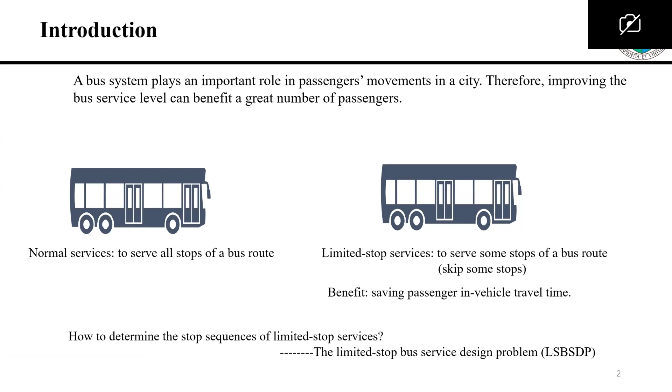That's the problem, and we name it the limited stop service design problem. After reading previous papers about the limited stop bus service design problem, we found that there is one important gap left: current strategies of providing limited stop services both have disadvantages. There are two strategies in the previous papers.

The first is the tactical planning strategy. With this strategy, an operator makes one determination about the limited stop service at the tactical planning level, and at the operational level, all limited stop vehicles provide the same limited stop service. This strategy has a disadvantage: low effectiveness, because it does not have flexibility.

The second strategy is the dynamic stop skipping strategy. This strategy means an operator does not consider the tactical planning level, and the operator makes one determination for each limited stop vehicle at the operational level. This strategy also has a disadvantage: the requirement of high computational efficiency, because the determination is done in real time.

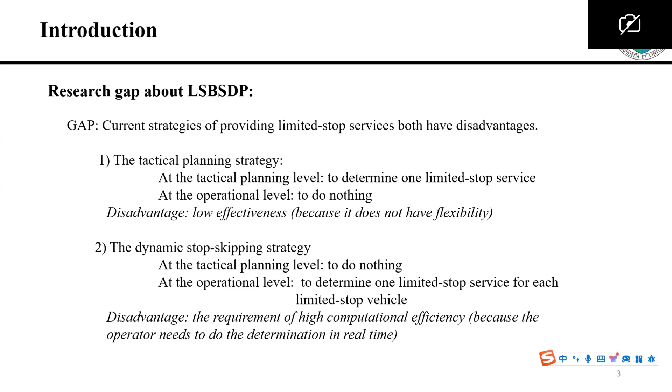As for stage 1, at the tactical planning level, an operator determines a set of potential optimal limited stop services based on historical travel time and passenger arrival rate, and this set is noted as L. At stage 2, at the operational level, for each limited stop vehicle, an operator selects one limited stop service out of L, noted l star, based on predictive travel time and passenger arrival rate.

After stage 2, the bus captain will drive the vehicle departing from the bus terminal and provide the corresponding service, and passengers will be informed by mobile phone.

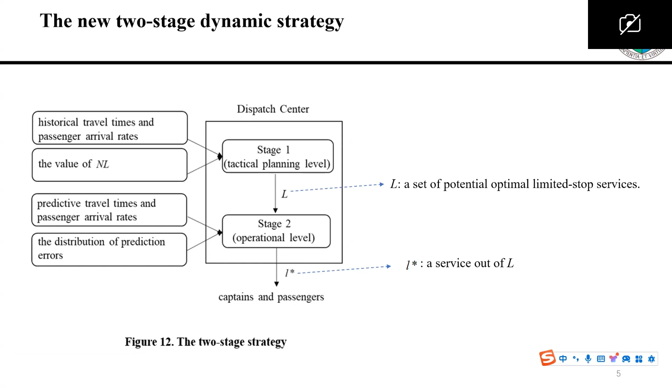When we model the new two-stage dynamic strategy, we adopt an assumption from the previous paper: normal and limited-stop vehicles depart from the bus terminal alternately.

Because of this assumption, when an operator wants to determine the service of one limited-stop vehicle, he needs to consider the operation of 3 vehicles: the last normal vehicle, the limited-stop vehicle, and the next normal vehicle. These 3 vehicles are denoted as one CV.

When we calculate the total cost of a series of vehicles, we can divide them into several CVs and calculate the total cost of each CV. The total cost of all vehicles is the sum of the total cost of all CVs.

For example, there are 7 vehicles. Vehicles 1, 3, 5, and 7 are normal vehicles, and vehicles 2, 4, 6 are limited-stop vehicles. These vehicles can be divided into 3 CVs. The total cost of these 7 vehicles is the sum of the total cost of CV1, CV2, and CV3.

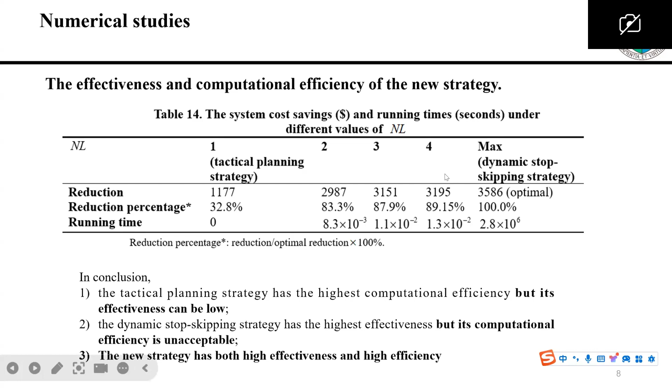These are my references, and thank you.

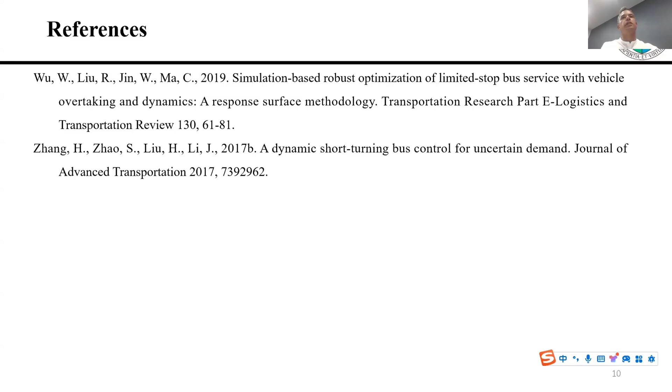I was wondering, what are the merits of your proposed model compared to the state of the art in the literature? Pardon? I posted it in the chat, can you check? Sorry, I found it here. I posted the question in the chat box, can you read it? Sorry, can you repeat your question? I'm wondering, what are the merits, the advantages, of your model compared to the state of the art, compared to the best models in the literature?

Merits, let me see. We did not compare the model with the previous papers because our model is based on our new two-stage dynamic strategy. We only consider the total cost, which is the same as the previous papers. The model itself is different from them.

Just to note, if you submit this to a journal, a reviewer will ask you, compared to the best models out there, what is the strong point? So maybe that's something further to consider.